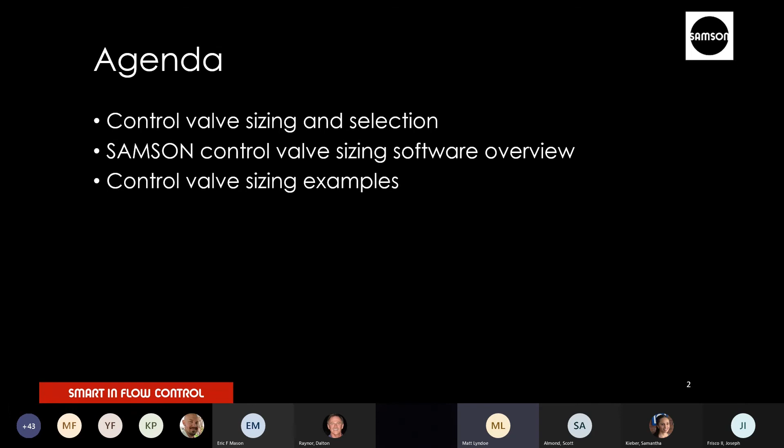And then secondly, we will talk about the control valve sizing software. David will give you an overview of how to use Samson software. And then like Sam said, thirdly, we will go into a few different sizing examples that should give you a pretty big range of the different things that you're going to run into when you're using the program and the different things to think about when it comes to sizing and selecting control valves.

And so how do you know which valve to size and select when it comes to economics? Maybe you want to find the most appropriate valve that meets your budget, or like should be the goal of any vendor you work with and of your team, you're trying to find the valve that is the least expensive that still does what you want it to do. Or how do you select the valve that has the right controllability? The valve that's going to have the control range that meets all of your process conditions and is working in its optimal location to make sure that it continues to control appropriately depending on what the application is.

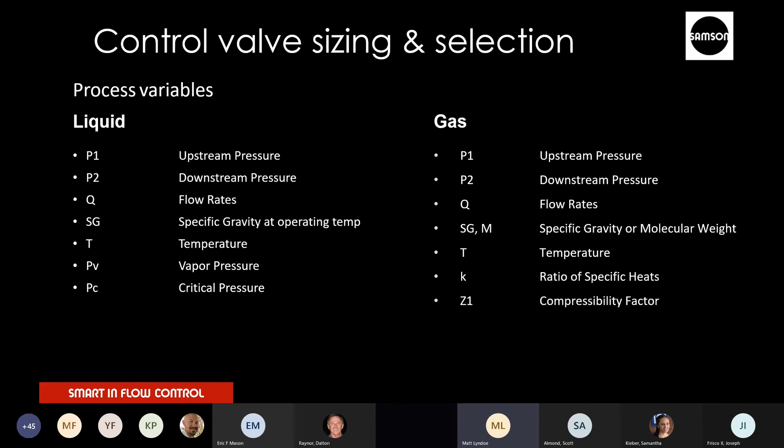And when you look at a gas, it's very similar in the criteria needed to size the control valve, but you do add a compressibility factor. And a lot of this information, this may be small on your screen, is typically organized in some fashion.

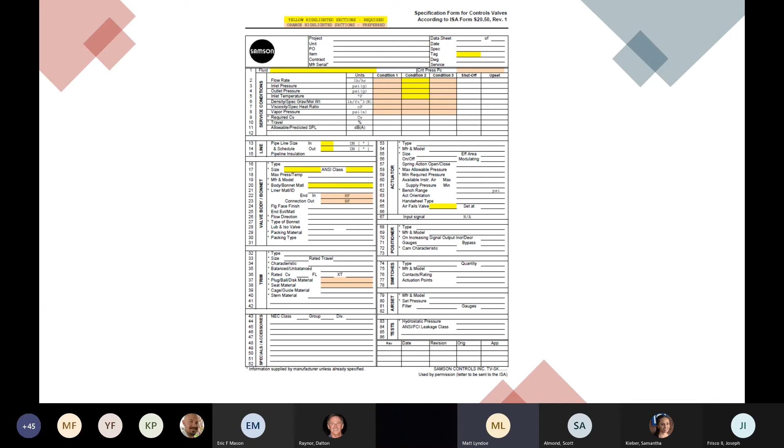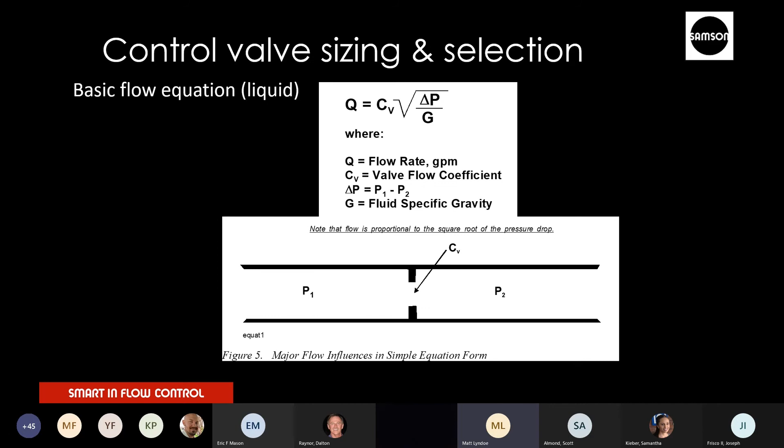There are a number of other factors in this equation. Factors like the liquid recovery factor, some type of piping geometry or swaging factors. There's a number of factors, and luckily for us and for you, you don't have to do this by hand. There are programs, like we're going to show you this morning, that take all of these factors into account in order to select the appropriate CV.

And so you see, if we rearrange this equation, now you have the control valve coefficient, CV, equivalent to flow rate times the square root of specific gravity over pressure drop. So in dealing with water and other fluids that are very similar to water, essentially the most basic equation is CV equals flow rate divided by the square root of pressure drop.

And so what is CV, the valve coefficient? What is it that we're going to show you in the program that we're trying to calculate in order to select the appropriate valve? Well, 1 CV, it's a unitless number. CV is equivalent to 1 gallon per minute of water at 60 degrees Fahrenheit with a 1 pound drop.

So if you remember back to the ISA sheet and the process conditions we showed, and now when you look at the CV calculation, the pressure drop across the valve in combination with the flow rate at a certain temperature, that's how you're going to calculate how much CV you need.

And I don't know the knowledge level of everyone on this call, but essentially, kind of in layman's terms, the appropriate way to think about it is just think of it as kind of an area or a volume, the amount of space required to flow a certain amount of flow with a given pressure drop. And you can think of pressure drop as a force, essentially pushing that flow through the valve.

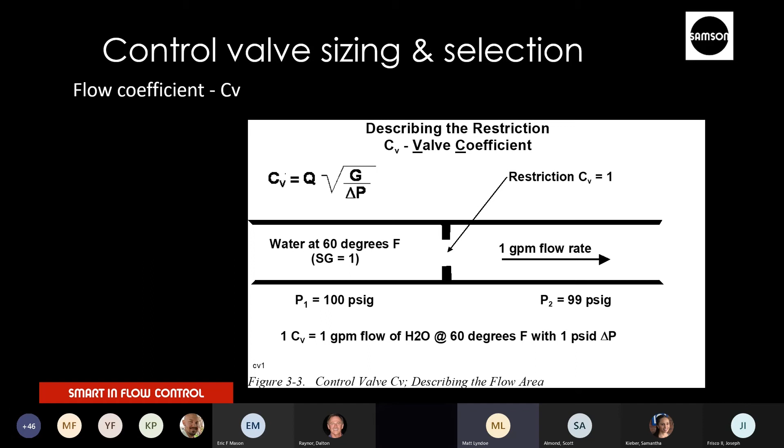And what's nice about control valves is that it provides a variable restriction. And so you put an actuator and positioner on this kind of dumb mechanical device, the valve, and all of a sudden you can work in conjunction with your measurement devices that are reading the process variable, whether it be flow or pressure or temperature. Those measurement devices can work with your control system and the algorithms, and they can tell the valve to move to a new location.

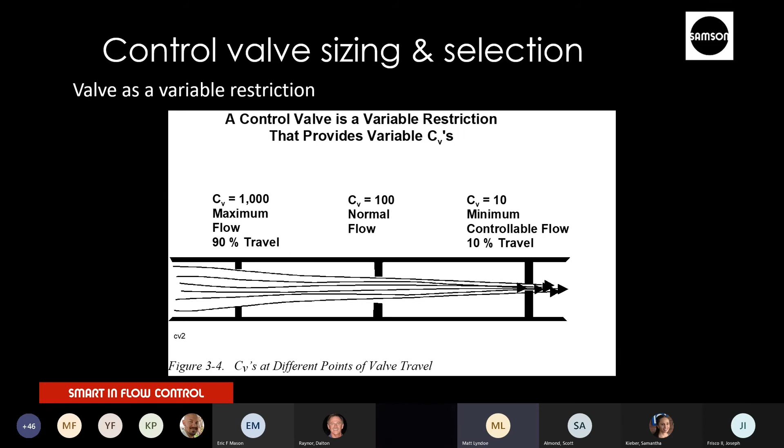And so when we're sizing a control valve, you're trying to find a valve that can move to these locations efficiently in order to handle this wide range of process conditions that you would like the single valve to handle.

There are times in an application when multiple different valve styles could technically meet the needs of the application, especially from a sizing perspective. You may plug in one condition that's your normal operating condition, and with that CV that you calculate, you go to our brochures or you use our sizing program and you see that all three of these valve styles have a rated CV that meets that CV. And again, that's why there's so many other factors that come into play with ultimately choosing the best valve for your given situation.

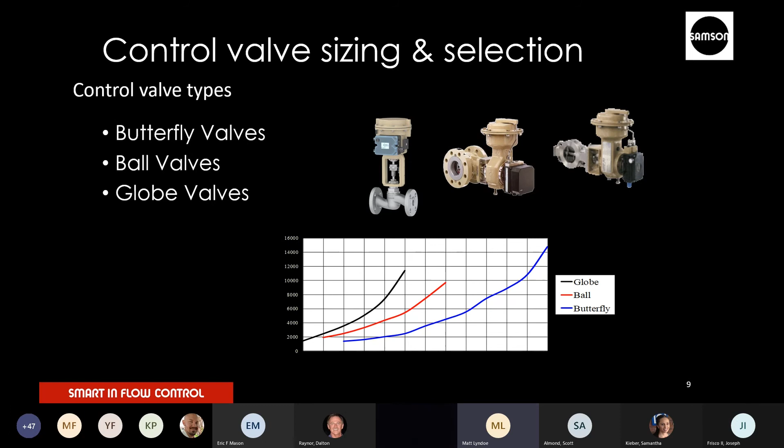And so these are the 3 different types of valve styles, and you're going to see these in David's example that he's going to walk through later. Okay, now I'm going to turn it over to David Tamm, and he's going to open up our software program and share his screen and walk through that with you.

Thanks, Matt. All right, let's go ahead and get this opened up here. So hopefully you can all see my screen now. Yeah, I appreciate the short introduction.

That's a lot of things to consider when trying to select a control valve for your particular application. What we're going to show you here right now is the program, the tool that we use to do a lot of this and make an appropriate selection. As Matt mentioned, there's various different types of control valves, and a lot of times there will be some overlap on what's appropriate. So we'll look at a couple of examples as well and see how each of those apply and where we can try to select the best possible valve.

So as you can see here, this is the sizing program itself I've got open on the display. Hopefully some of you have this program already. If you do not and you would like access to this program, get in touch with Samson and we can send you a link to download the sizing software. It's just a basic install program for the computer.

I'll go over some of the functions here and just a couple of minutes talk about some of the features of the program that'll make it a little bit easier and a little bit more fluid to work with, so you know a couple of the tips and tricks that you can use to make it work best to your advantage. So if you can see here, like any general program, we've got our basic command bar here on the top. I've already opened a new project.

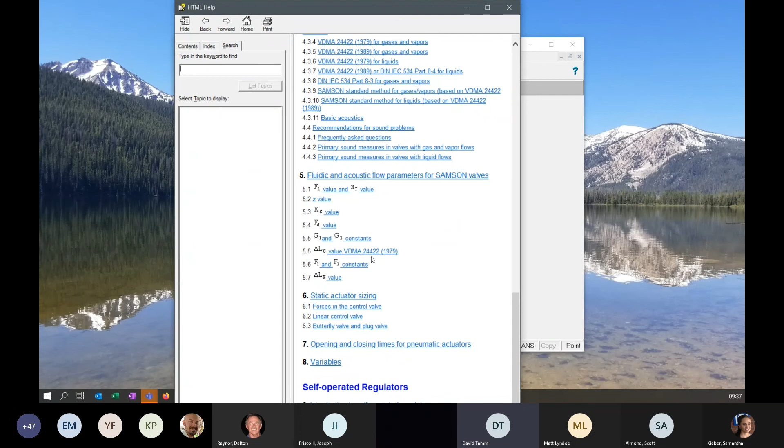And so you can read in here a little bit more. So you have your FL, XT values, a lot of these different values that we're looking at, and it'll explain in more detail how you calculate these numbers, what's the importance of all these values, things like that. And certainly, if you have more interest on the topic, we can schedule some more time to go through that in more detail at a later time. But just for the sake of time, we'll kind of go through these quickly.

So we have our FL value, which is the recovery in the valve. We have the XFMR, as you can see, is related to XF. This is going to show you when the valve should experience critical cavitation. So as long as this value, the original XF, is lower than the XFMR, then we should be in good shape. And then the FD value, that's where we would start to see the beginning of choking cavitation. And some of these may be a little bit different than variables that you're used to from other manufacturers. So this is just nomenclature that Samson has been using in developing our software over many years.

The XFZ value, this is incipient cavitation. So again, goes back to the same XF value. This will be incipient cavitation. Then we have F1 and F2. These numbers are tabulated values that are plugged into the sound pressure level calculation. So these are values that you're going to see used in order to calculate the sound pressure level. And so F1 and F2 are important. If you're sizing a gas, it would be G1 and G2. They'd be slightly different factors, but those are going to be the important factors for the noise calculation.

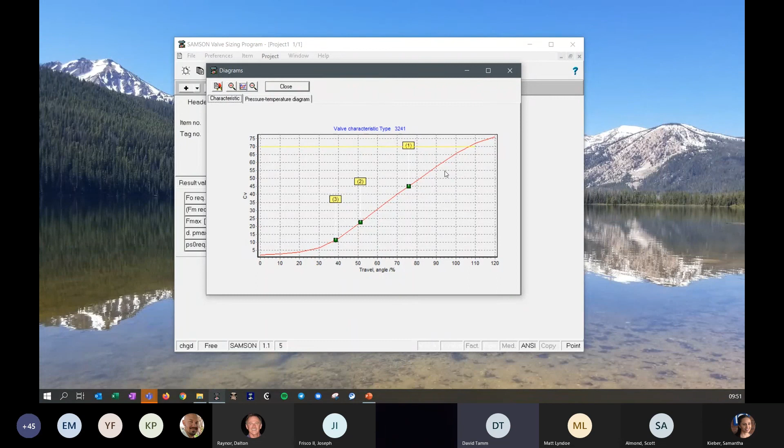So it's a nominal value of 70, but depending on if that trim set is being used in a 3-inch valve or a 4-inch valve, it might vary slightly. So this is a particular tabulated value where it reaches the nominal value. So you can see we achieved just over 70. So actually at 100%, it'll just be at about 66 for this particular combination of that nominal size.

And then we'll see here, we also have a pressure temperature diagram, so you can see each of the pressure classes for a particular material. And to zoom in here, if you click and you just drag a box, it'll zoom in on what we're looking at. So you see the yellow line is class 600, green line is class 300, the red line is class 150.

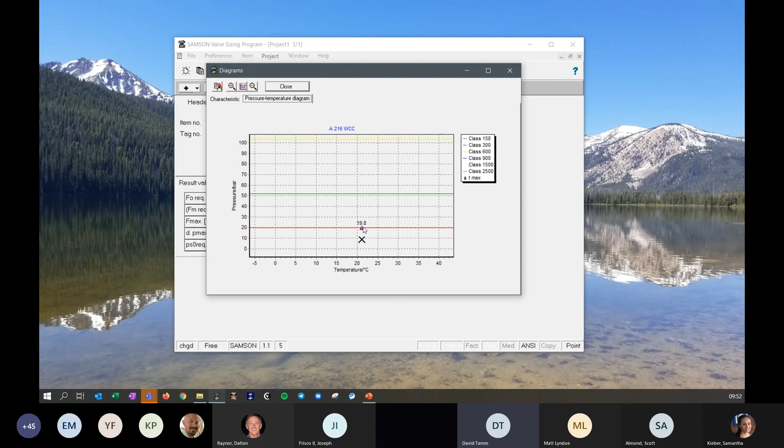It'll put an X at our design conditions, and then it'll give us a triangle. That'll actually show us what our maximum allowable is for a particular temperature that we're operating at. That'll give us our maximum value. As you'll see here, it's converted, it's in bars and Celsius. That's just based off the ASME standards. So it uses what's tabulated in ASME to pull that out and shows you there on this graph.

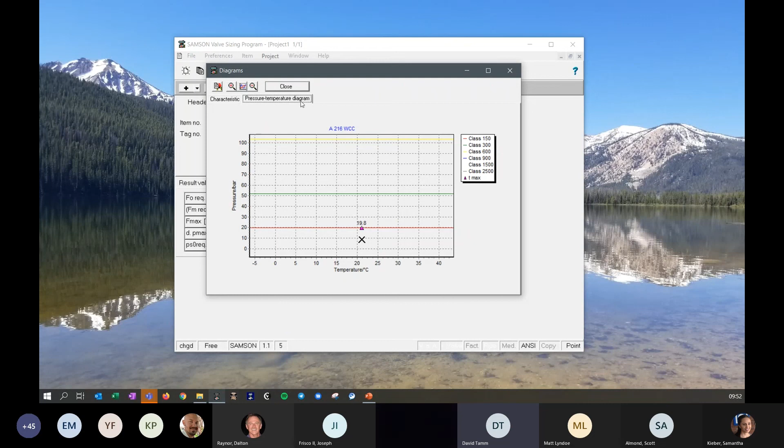So those are going to be the main general functions of the program, looking at a very simple application. Now we can look at another application here. I'll create a new sizing. So a couple of different functionalities that you can do with the program. When you click this down arrow again, if you just click the plus, it's going to do the same thing we did last time. So it'll create a new ANSI standard.

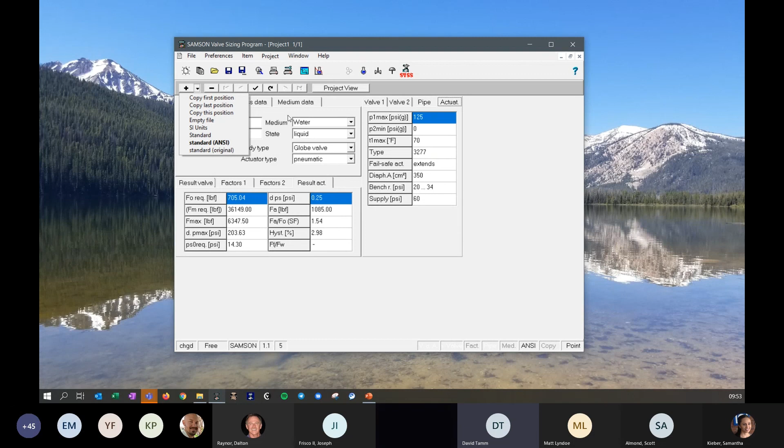You can also copy this position. You can copy the first position or the last position. So if you're making duplicates, or let's say you have a selection that you really like and you don't want to mess with, you can copy it and then tinker around with the CV value and then delete it and go back to your original if you like. So that's a good way to see your additional options. I'll go ahead and just create a new sizing and call this number 2.

And we'll look at this case. This would be another case where, like Matt mentioned, maybe the controllability and having a very precise control valve like a globe valve is not the #1 priority, and we have a very small differential pressure, which means we need a larger CV value. We can look at another operating case. Let's see here.

So let's say 400 gallons per minute, and then we'll use 100 psi, and then we'll just do a 1 psi drop. So something very small that's controlling flow, but you're trying to minimize pressure drop, something along those lines. So we'll just enter the first case just to do a sizing. On the header, we'll calculate it as a globe valve to start with. Our medium data, again, with water is automatically populated.

We hit a sizing. As you can see here, if we keep it as a globe valve, we'll need an 8-inch valve, and that's because the CV gets very high. The maximum CV of a 6-inch is right around 400, and it has a minimum 1.1 safety factor on the CV value as well to make sure you're not exceeding the stroke of the valve. So this will actually bump us up to an 8-inch valve to achieve the flow that we need.

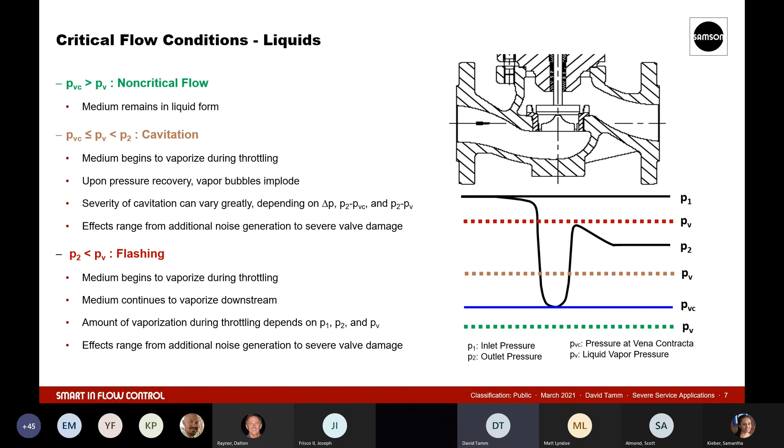If you're not careful about valve velocity, you can see here some of those high velocity jet streams could carry those cavitation bubbles and implosions onto the valve walls themselves as well. That's why it's important to look at the velocity as well. And so that's just a brief introduction into what cavitation is inside a control valve. So now that we understand that, I'll plug in an example here and show you some of the warnings that you'll get from the program.

So I'll create another example here, and we'll call this one a pressure control valve. And again, we'll use water as an example, and we'll go a little bit higher pressure on this one to see the effects. So again, we'll do 100 gallons per minute just as an example, and then 500 PSI at the inlet, and 200 PSI at the outlet. So we have about a 300 PSI pressure drop, and then we have 70 degrees Fahrenheit.

I'll do a second case here, so I'll drag and drop, and this one I'll drop our downstream pressure to 0 PSI. So we're going all the way from 500 PSI down to ambient. Another function I didn't mention at the beginning: if you want to work with differential pressure, you can click the drop down to change units, and it'll give you quite a few different options. You can click delta here, and that'll be P1 and then your differential pressure instead. So you can see 300 PSI, and this will do a full 500 PSI pressure drop. But I'll put this back into P1 and P2.

So we have our conditions here, and I'll hit size again. So now you can see we get a couple of warnings. First is going to be cavitation noise. That's when we're dropping from 500 down to 200 PSI, and this is creating some noise. So we would recommend potentially using harder surfaces, something like a stellite surface trim, to prevent a little bit of cavitation, but mostly it's just generating a little bit of noise, and it's not causing a lot of damage.

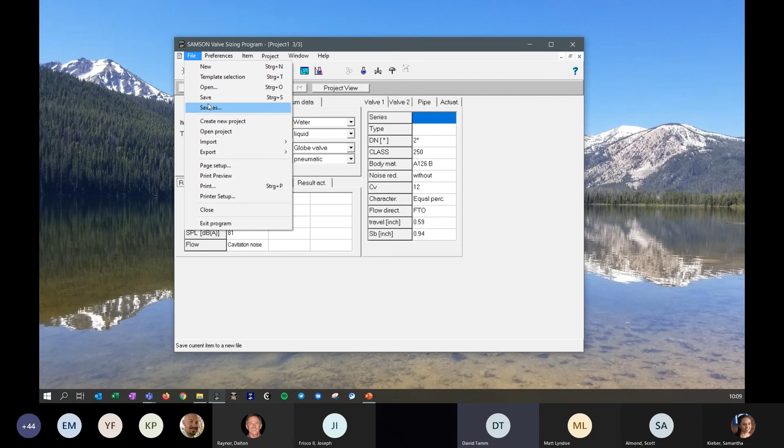So that's a few of the basics from my side, just talking very generally about the program, some of the functionality of the program, some of the things to look out for when you're sizing. One last thing I can introduce here would be saving the sizing. So you click Save As, it's all pretty straightforward. So I can save this on the desktop, and you can reopen your program accordingly. Other than that, it's pretty straightforward, like a standard program would be. So there's nothing too critical here.

One thing that we can look at is the printout. So I'll go ahead and do a print preview. So we can see this is the standard printout that we have, and then we can do a couple of different formats with the printout, but this would be the standard printout view. And you can see here, this will give us all of our process information that we entered. It'll give us the basic results that we were all looking at there. And then in the final sections, it will show us the valve data that we've selected here.

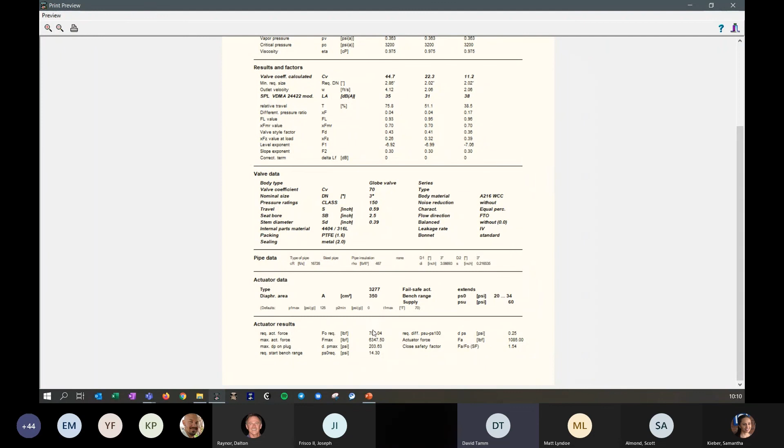I'll go back to the first one since we did a complete valve. We have our buttons here. This will switch between valves, and then this will go all the way from the beginning to the end. The minus button here will delete a sizing that exists. I'll go ahead and do the print preview here because it's been fully completed. And you can see here all of our results, our valve selections, materials, leakage class, bonnet selection, piping that was used, and then it'll also give us our actuator data, our operating conditions, our supply, and then all of our actuator results down here that we looked at: required force, the max force, and ultimately our closing safety factor, which is critical.

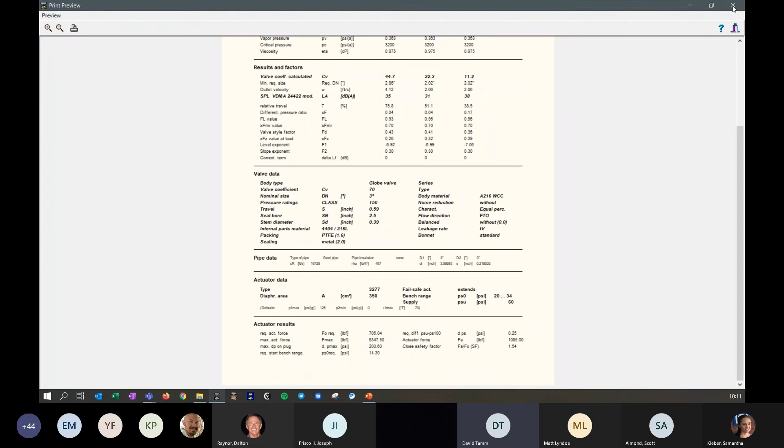So that basically wraps it up from what I have prepared. I'll invite Matt and Sam to join back in the discussion. We can go over a few of the questions that we have here. Let me go back through. Perfect. Yeah. Why don't you, David? Why don't you leave that open, and we'll walk through the questions, and a few of them you may need that program. Yep. I'll go ahead and walk through them. I wrote them down here so we didn't have to scroll through that list.

So the first question was regarding noise attenuation options for ball and butterfly valves. As we talked about, globe valves have the most options when it comes to severe service and handling cavitation. But when you look at ball and butterfly, most control valve manufacturers will have some type of option on their ball valves and butterfly valves. For example, David touched on our VETEC valve, a rotary plug valve. We have various, whether it's on the ball for a ball valve manufacturer or like us, we've got various downstream options that are kind of part of the seat on the outlet of the valve.

And so they're essentially drilled holes so they can stage the pressure drop to make sure that your pressure does not fall below the vapor pressure and cavitation doesn't happen. Or from a noise perspective, they will shift the frequency so it's outside of the audible range and lowers the noise that a human can hear. And also on butterfly valves, we have special looking discs that do the same.

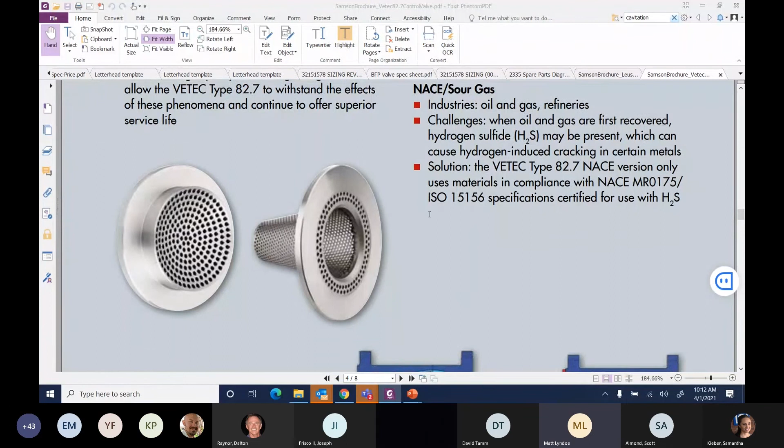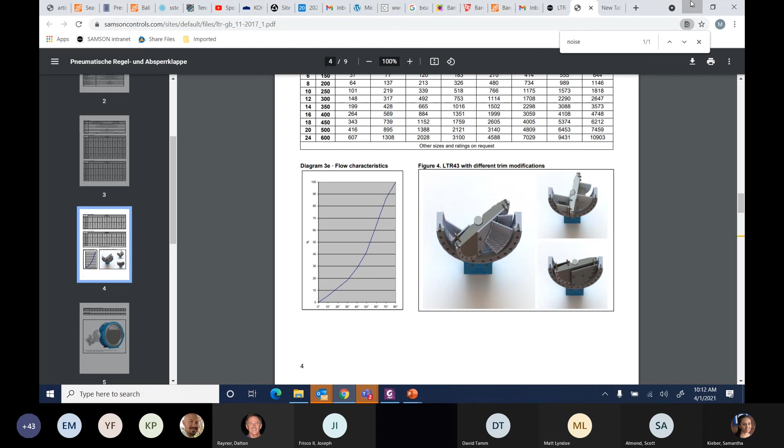Let me just show you quickly. Here's a picture of our rotary plug valve, those options. And then also here's on a butterfly valve. This is our Leusch triple offset valve. You see these attenuation plates that we can put onto the disc. All right. So hopefully that answers that.

And now the next question. Are fuels in the sizing database? So David, you showed some of the medium in there, but... Right, there are some in there. I don't know if there's a particular fuel in mind. I know there's a whole lot of them. So yeah, there's some of them I have seen are missing. So it's not literally every media you could dream of, but it's a pretty substantial list. So there are several fuels that are in there.

But it would really be if there's a particular fuel that we're looking at, and it'll get down into the, there's quite a few different things. So it'd be really, yeah, looking into a lot of the just different options that are available as a particular media. But by and large, there's several thousand media built into the medium database.

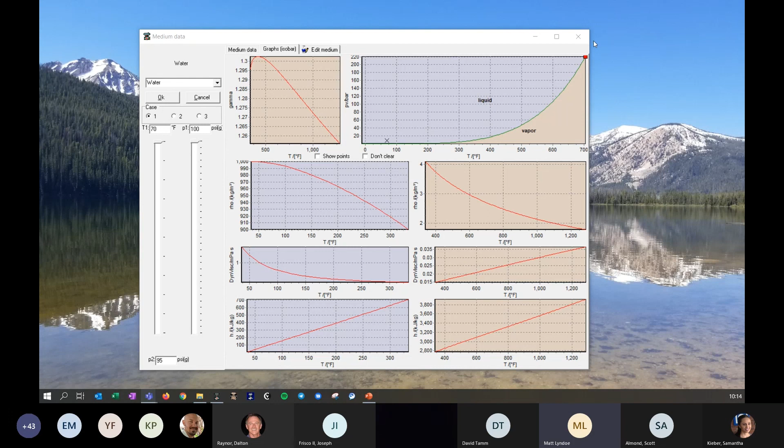Okay. All right, perfect. Thirdly, they were asking about the close-off pressure for the actuator, and that was before you eventually did address that. Okay. As he showed, considering the shut-off pressure in your application, we will select an actuator. The program will select an actuator that's appropriate for the shut-off pressure. If you remember, it will grab your P1, your upstream pressure, and put it into the database, but then you can modify that if your shutoff pressure is higher than that. So hopefully that answers that question.

Then the fourth question: is the flow velocity being calculated at the vena contracta? Loved seeing that. You know somebody's interested in control valves when they ask that question. So if you remember, David talked about, and we probably all remember back from our days in college, Bernoulli's equation. So as you're moving through that restriction, trying to pass that same amount of flow, you're going to have an increase in velocity, and there's going to be a decrease in pressure. And so that is calculated. That's the highest velocity point.

But I think, David, they were specifically asking when you were discussing outlet velocity. Correct. And so is that what is taken into account when we put that into the program? Exactly. So it's the outlet velocity as well, and that's actually what's displayed, the outlet velocity once the media has exited the vena contracta and essentially has entered that larger volume on the downstream side of the valve. So vena contracta velocity certainly is important as well, and that's taken into consideration in the sizing, but what's displayed here is going to be the outlet velocity.

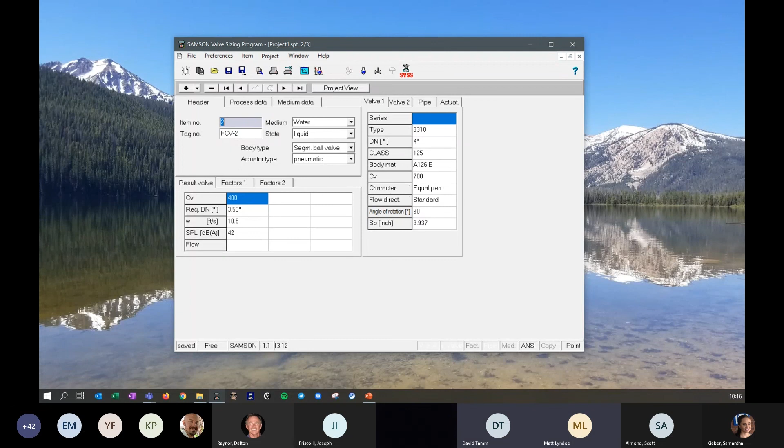Okay, perfect. Question number 5: what happens if the calculated CV range is too large for a single valve to span? So before talking about the program, of course, the initial answer is you may need to move to 2 different valves for the application, but always remember to look at other valve styles. Maybe you're originally thinking that a globe valve can handle it, or you have a globe valve installed and you think I'd like the same fit, form, and function, the same face-to-face, so I don't have to do piping mods. Well, remember that you could move to a valve with a higher rangeability to maybe handle it.

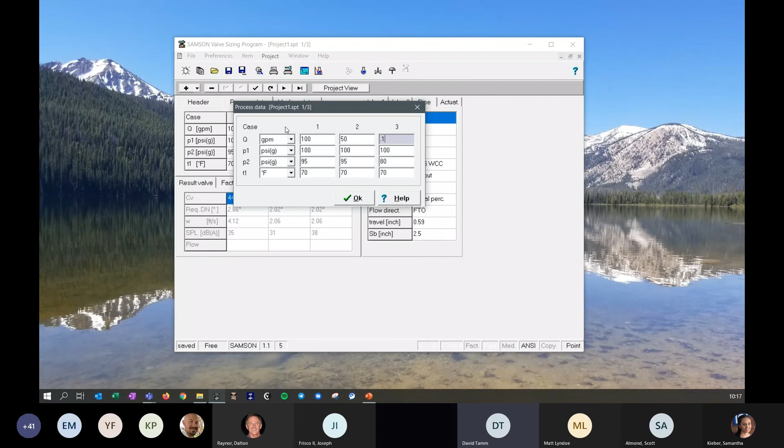But considering the program, what type of warnings will it show, David, if the valve we've selected doesn't handle those 3 conditions? Sure, exactly. We'll get a warning here, so we can say, let's say 0.5 gallons per minute, or even something smaller, maybe 0.1 gallons per minute. So generally that would be a 1,000 to 1 turndown ratio, which would generally be impossible for any control valve. So we'll keep all of our selections the same here. Let me do that again.

And as you can see here, in the following cases, the capacity is smaller than the rangeability. So you'll get a pop-up warning, and then it'll show you case 3 here. If we close it, additionally, when you're looking at the results, you can see the CV value is much, much smaller. If we go to the relative travel, it'll just give you this little indicator that it's basically 0. So once you get to a very small CV like that, that's the warning that you'll get.

Yep, and I'll just add to that. I mentioned it on the one slide considering butterfly valves in terms of the best control range. Well, for a ball valve, that increases a bit, and we typically like to stay between 20 and 80 degrees open. And then for a globe valve, we'll typically like to see 10 to 90% open. So the program, even if it doesn't give you a warning and the valve technically can move to that location, when you go look at the curve on the results, you can see that it might be outside of this control range. And that's when the interaction with us comes in handy to understand that.

And maybe you tell us, well, my minimum case is only going to be, in some situation, for 20 minutes a day as I just fine tune the amount of steam I'm sending into a vessel or something. And so even though it's at 7% open, we can have that discussion and say, well, that's not going to affect the reliability, and it can still be handled with the rangeability of this valve.